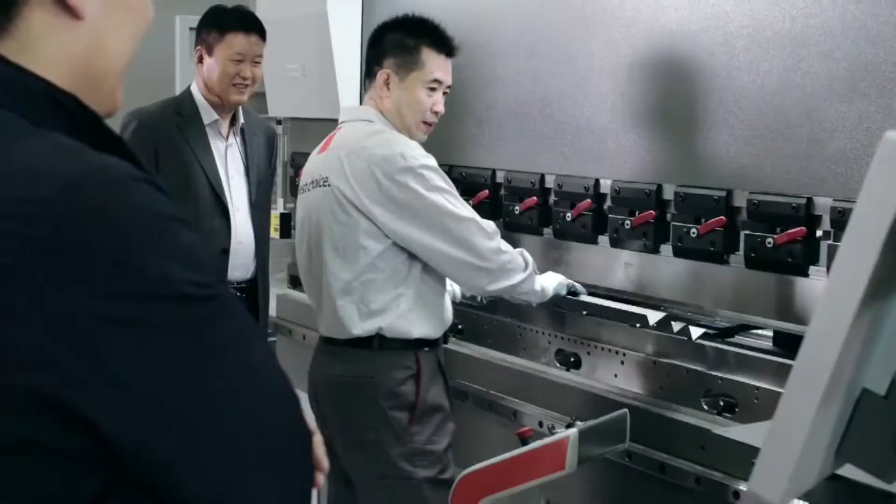Sorry, we are here for you. I mean, I hear the words, but I'm not getting anything from them, you know? Could you please just say the lines?

May I? It means that we offer much more than just a machine. We support our customers with flexible financing models, training, maintenance, a long-term spare parts service, phone hotlines and online support. And we also operate local sales and support offices in many, many countries.

Yes, now you see, now it's coming alive. We should be saying this. It is more text, though, so we will have to renegotiate with my agent. Can't you just record it and we'll look at it later? Well, I'd love to, but my agent would kill me. If only. Fine then, continue with the script. Right you are. Where were we? At customer service and post-sales services, would you believe? Rolling.

We don't simply develop machines that cut or bend sheet metal. Our customers need flexible systems for ever-changing order positions and batch sizes. Automation to achieve top productivity with integrated systems and the right software that cross-links everything.

Bystronic stands for Swiss quality. Sorry, really? Swiss quality, I mean, it's a bit of a cliche, isn't it? And actually, while we're at it, your slogan, best choice, kind of sounds like we've just won the buzzword bingo. Guys, if you want to sort this out, I'm just going to pop out for a smoke.

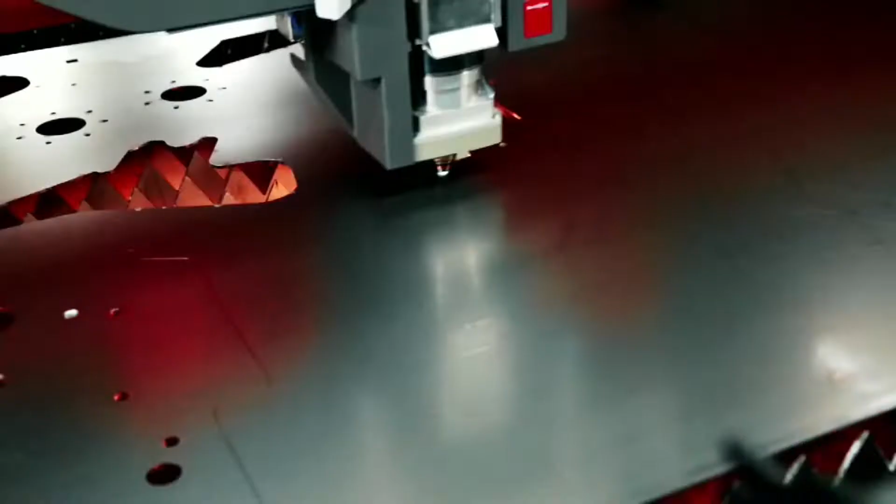Let me explain. First of all, Swiss quality. Do you know the Bystar fibre? The Bytrans Cross or Bysoft? Have you ever seen them laser cutting and bending those sheets? It's like butter. Once you've seen it, you can't help but be excited. The beauty of a laser cut, the precision of a bent metal sheet, from very small to very large, but all with the precision of Swiss clockwork, perfectly formed and expertly fitted.

Now, best choice. When you say yes to a partner, be it in business or private life, you make a commitment to the future. Now, you're still young, but one day, you're going to want someone for the long run. Someone who shares your vision for the future. You see, at Bystronic, we think about tomorrow's sheet metal processing.

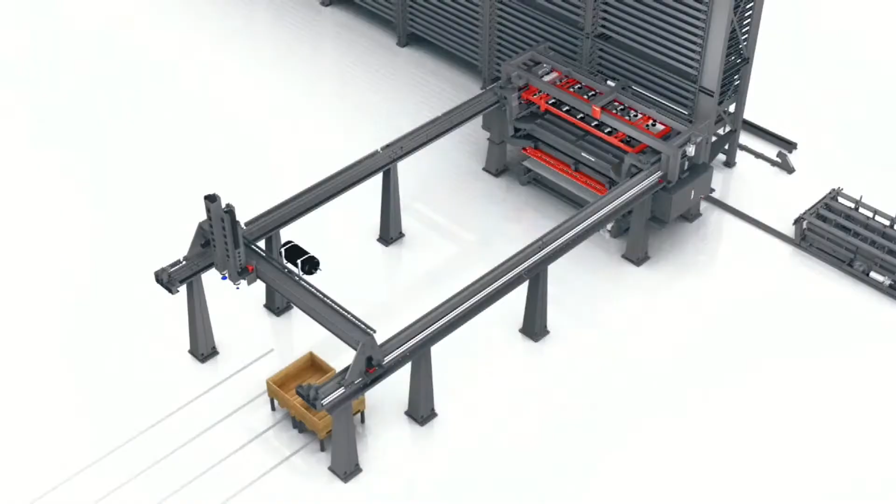We have some footage of that, right? In what we call the smart factory, variable orders will be produced automatically on flexible systems. A clear vision and state-of-the-art technology means cost and process optimization, which in turn means higher earnings. And who's behind this success? The employees of Bystronic worldwide. Now, you'll say that's just another cliche, but nobody else sets new standards like they do, with their enthusiasm, their ideas, and their know-how.

Actually, I stand corrected, because our success is also due to our clients. It's their feedback that we use to develop new technologies. And until they are perfectly functioning, we will not launch them. And none of our employees will settle for less. Not in Asia, not in America, not in Europe, not in Switzerland, nowhere. And that's what we mean by best choice.

I'm sorry, I think I interrupted you. Did you record this? Sorry, did he say something? I couldn't hear a word. He says we're done. Really? That looked like more words to me. No, really, we're done. But you can stay here till 5 because it's in your contract. Oh, no, I'm more than happy to do another version. We'll just reach my agent later on. That's no problem. Gentlemen? Hello?

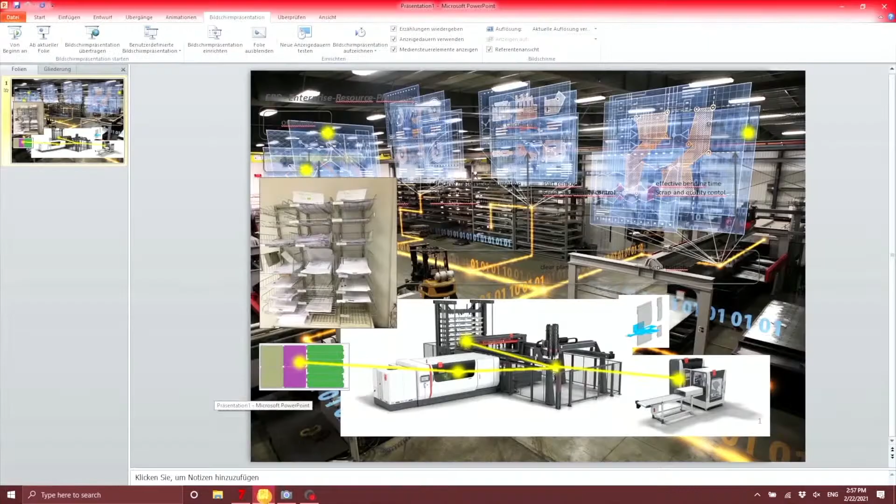Imagine your sheet metal production as follows: for example, you have a laser system with automation, a small storage tower behind it, a clearing area, and an automated bending machine. The entire production order, from quotation to shipping and invoicing, is managed in your ERP system. You receive the parts from your construction department, or as 2D or 3D data from your customer.

The NC programs for your machine are generated in the production planning and programming department. At the beginning, the customer's production order is created in your ERP system. All other data is thus already generated in digital form. At the same time, CAD data are also designed or made available, and these must now be transferred to work preparation.

Most of the time, it looks like this. This is a picture from our own work preparation before we worked with the Plant Manager module. Order papers are printed out and the programmers have to import these 2D or 3D data individually into the Bysoft 7 software.

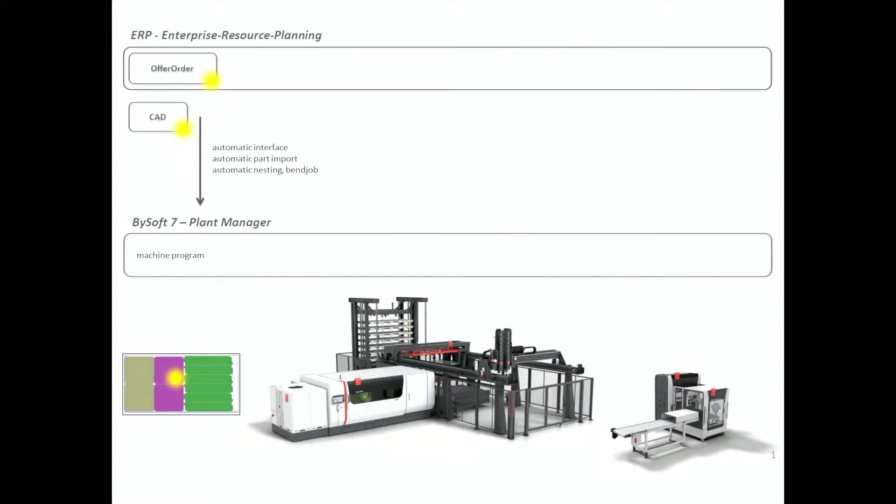The jobs are now sent to the laser and the bending machine, which the operator already sees in the optimal order in the control's job list. The jobs are sent to the machine in such a way that setup and non-productive times are as short as possible.

If the job has been cut or bent, the machine automatically reports the production data back to your ERP system. This gives you the perfect basis for an order post-calculation.

The machine reports back the actual material consumption, including the waste. You can thus trigger a raw material posting in the ERP system. The ERP system receives the effective cutting and bending time, including waiting and stopping times, in order to book these on the order.

The Plant Manager has the part removal module for quality control and for reporting rejects. A screen is made available to the operator in the clearing area, on which the cutting plan is displayed visually. He can thus quickly and easily sort the cutting plan onto pallets based on orders or other criteria.

With the Plant Manager, you can digitize the entire process flow and no longer have to manually book the individual process.

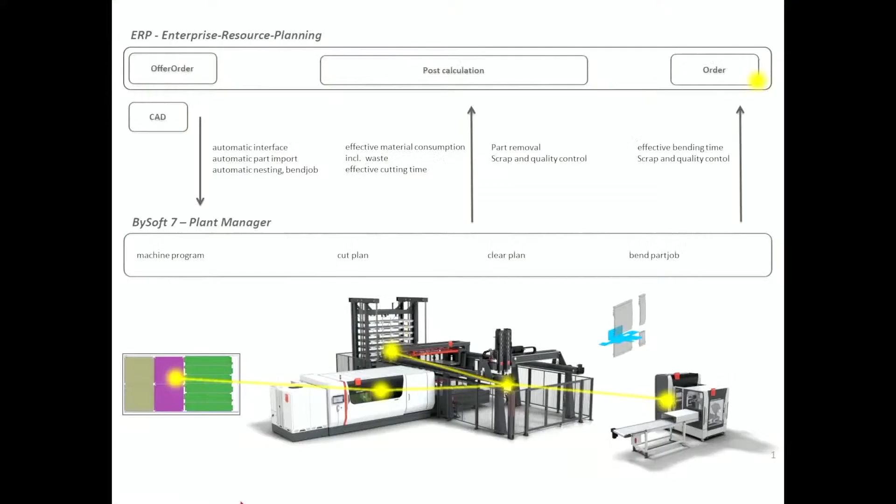Let's assume my customer ordered the parts and I want to manufacture them. The Plant Manager runs as a service and is installed on your server, so it works 24 hours a day, 7 days a week. If a production order is now created in the ERP system, it can be imported automatically.

In my example, I have a Bystar and a Bysmart Fiber with different laser powers. There are also two bending machines: one Xpert 250 tons and one Xpert 320 tons, each in 4 meters.

The Plant Manager knows the available raw material sheets and also the residual sheets. These are selected automatically. Perfect nesting plans are now generated for the respective material and the respective machine. Residual sheets are automatically engraved and saved in the administration. All of these jobs are automatically scheduled in the calendar.

The bending jobs are also generated with a job assistant. All bending programs are planned in the perfect order on the machine. You already know the module - it is the tool setup optimizer, which is executed automatically in the background and guarantees you an optimal bending sequence on the machine.

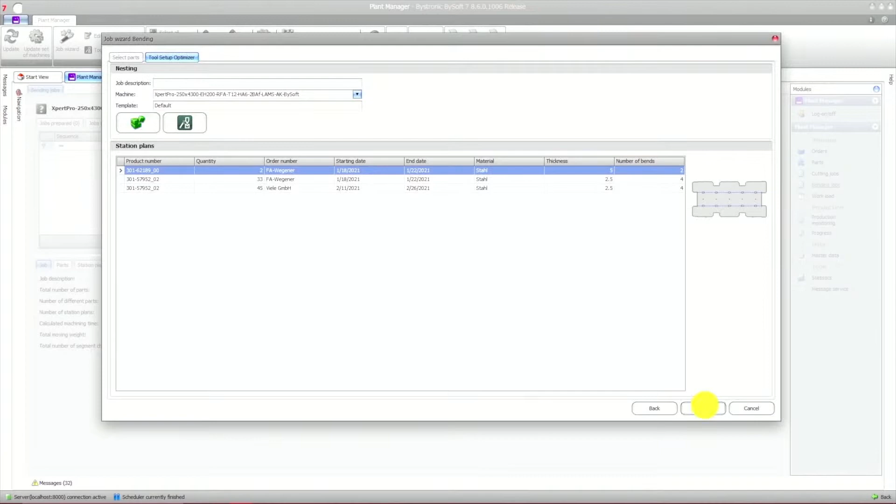Thus, all machines are perfectly programmed. To remove parts from the laser machine, the part removal module is available. In the part removal program, the cutting plan is shown in color according to the order number or according to individually adjustable categorization, such as the customer or a subsequent work step.

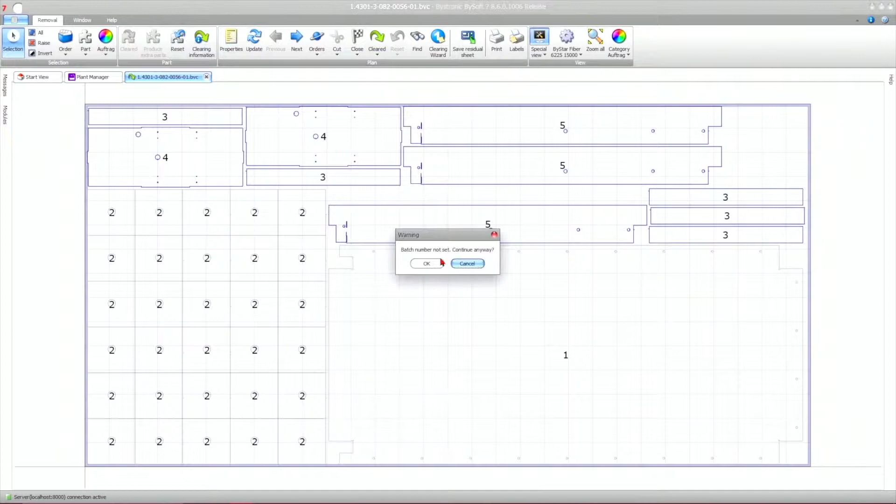With this information, your machine operator clears the cutting plan in the shortest possible time and sorts the parts onto the correct pallets with little effort. In addition, batch tracking and residual sheet management can be maintained via this module.

You see, the Plant Manager is the optimal support for your process planning and your programming department.

Orders can be sent from the ERP system to the machines in a paperless and process-reliable manner within a very short time. In this way, you not only optimize the interfaces, but also your entire production process.

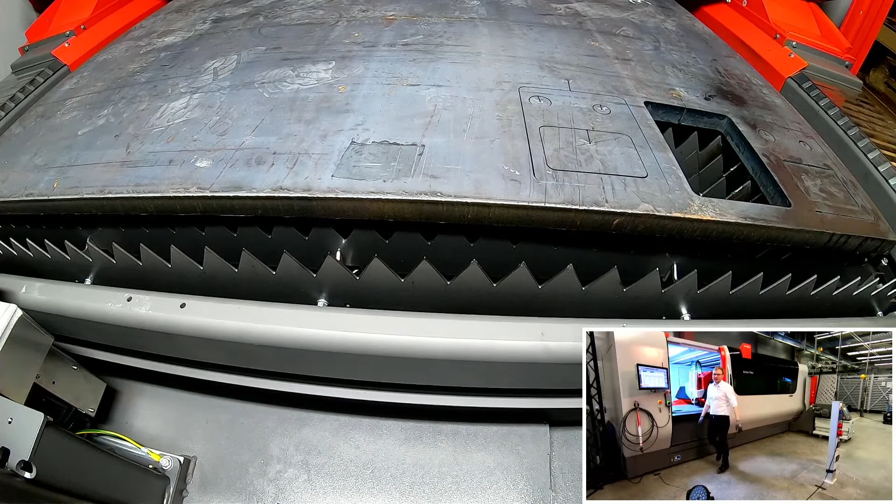We are now nearly finished with the part, you see, and we can now open the door. I don't want to touch this part now because I think it's quite hot. But this is nearly the same part we did a couple of seconds before in the last event, and that's 30mm cutting with our flagship product, the ByStar Fiber 15 kilowatt.

And with this, I will hand back to my wonderful colleague, Sarah. These are great news, Eric. Thank you. So this 30mm part is not only there to show you how fast and precise we can cut even in thick material. This ByStar Fiber 15 kilowatt laser cutting system is also a part of Bystronic's future.

So Carsten, can you tell us more about Bystronic's future?

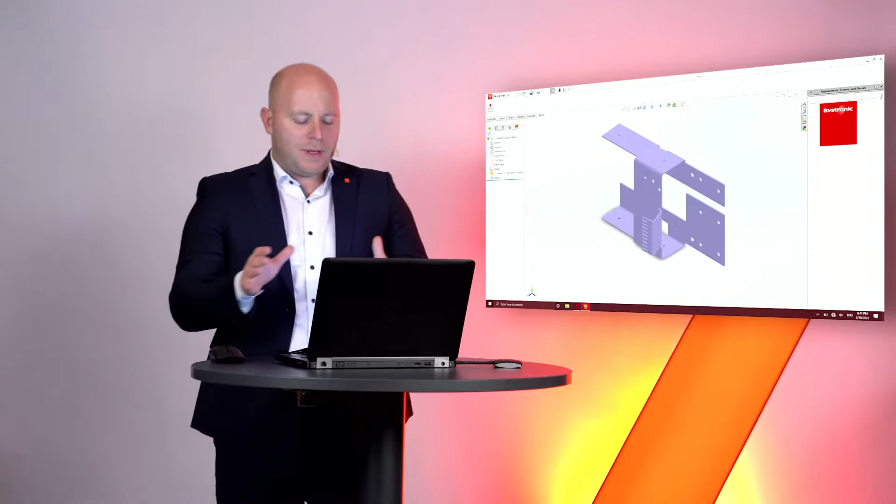We create and import 3D parts normally with the Designer. The Designer is our CAD module, and sheet metal parts can be constructed to be bendable and imported here. File formats such as STEP, STP, and SAT files, as well as native data, can be imported here, and the processing of assemblies is also possible.

Today I will show you how we can import all this data with our new module, AutoPart. The AutoPart module enables you to process 3D files, 3D parts, and assemblies fully automatically, and create bending and laser programs. In addition to STEP and SAT files, native data and assemblies can also be processed.

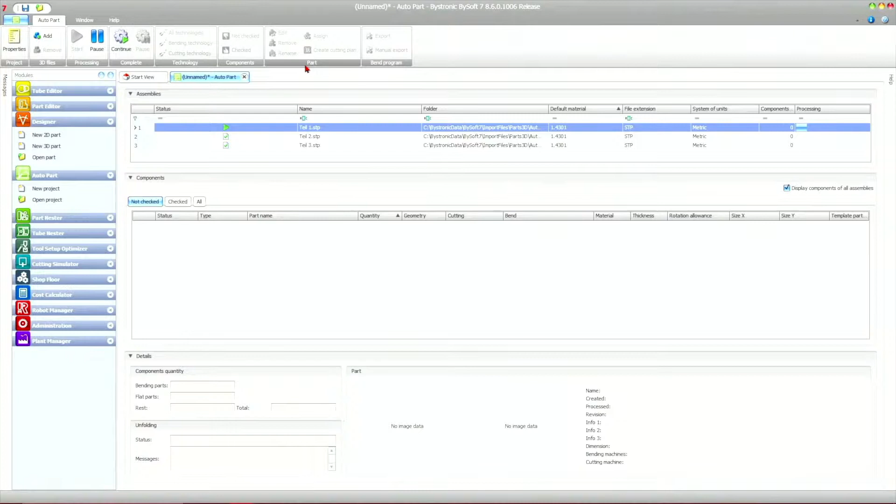The assembly will be separated and correctly unfolded at the same time, and the flat and bend programs are created. Non-sheet metal parts are recognized and filtered out independently. So I will start the automatic process, and we will see how the program unfolds the parts and sets the right bending and cutting technology.

The parts inspection shows you at a glance whether manual post-processing is necessary or the component is finished. The components are automatically saved and ready for production. On this part we have a warning, so I open the part editor to check what's wrong with the part.

Bystronic works with traffic light colors here: red is for not producible, yellow is a warning sign, and green is error-free. In my example, a contour is recognized in the entry zone of the bottom tool. This can now be provided with a relief cut independently and quickly.

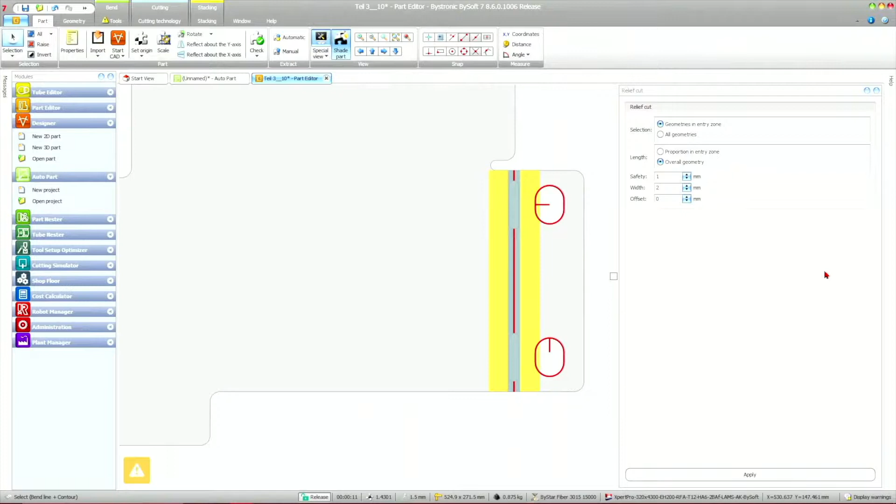A change or alteration to the geometry requires the bending technology to be restarted. The bending process is now simulated and the feasibility checked.

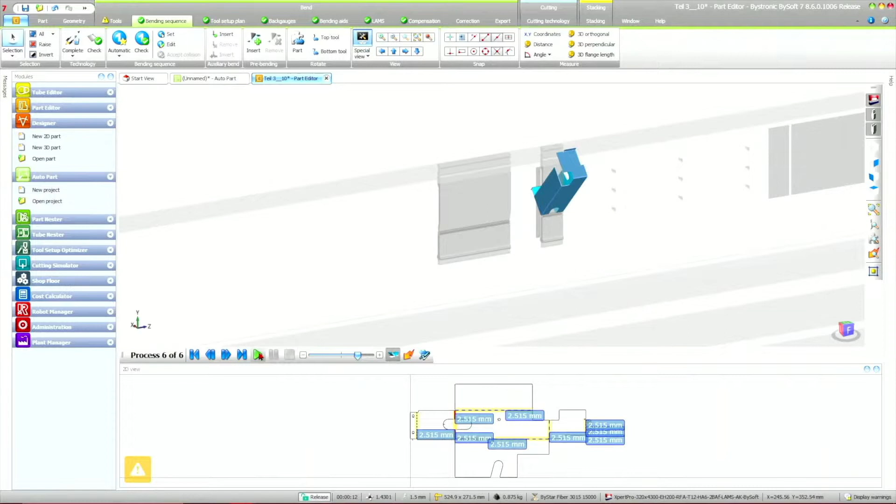The existing top and bottom tools are loaded from the virtual tool cabinet, and with automatic bending technology, the part is automatically shortened correctly. BySoft 7 works with empirically determined values which ensure that the parts fit perfectly. The bending sequence, tool setup plan, backgauge position, and all further process steps are also created automatically. It is possible to intervene manually at any time and flexibly adapt the process steps.

Here we can see the estimated bending time, and we can see the cutting time for the laser.

With the tool setup optimizer module, the bending programs created are now put into the optimal sequence in order to minimize the setup process on the machines.

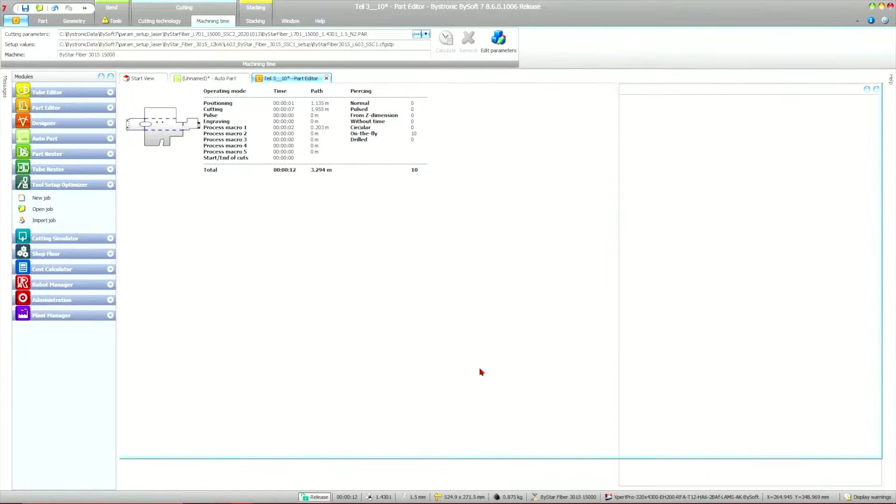Here you can see the different parts from the auto part module. A bending job with several bend parts is created as a package. The bend parts are loaded and put into the optimal order using the program tools and the station plan. Tool time, setup time, and bending time are taken into account here. The operator of the machine can thus start a job once and guide it through the shift.

Now it is possible to switch to our other program. It's called Cost Calculator, and with this program it is possible to do a perfect part cost calculation. Here you can see we have different laser machines and different process steps, so we can choose if the part will be cut on a BySprint Fiber or on a ByStar Fiber. So I can select the right cutting machine.

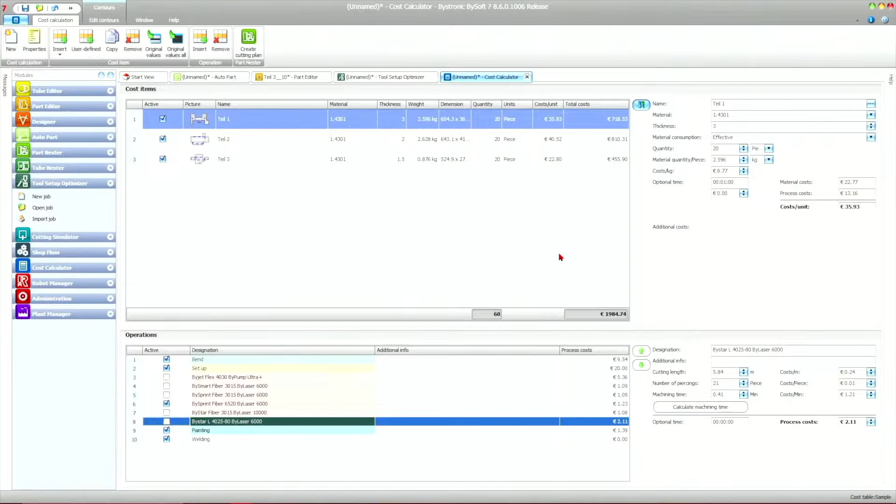And now we get the costs for this part. We can see the material costs, we can see the process costs, and can send this information to our ERP system to have a perfect calculation for an offer or something else.

This is how quickly and easily you can create perfect laser and bending programs with BySoft 7 in a full automatic way.

Good job, Benjamin. So let's continue with the bending technology for highest demand on process speed and flexibility. Our flagship, the Xpert Pro, highlighted by the dynamic crowning and the laser angle measuring system, presented by Ronny.

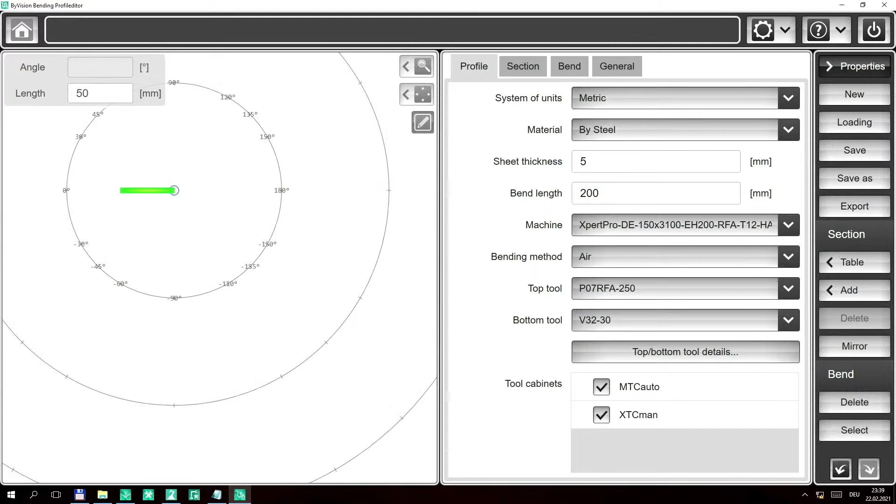Then we have to bend 5 bends: 1, 2, 3, 4, 5. This is very simple - we search a start point, then we can slide with the finger around the screen, and then we can select the bend length. We can also just touch like this, and go to the table, and here we can type in our bend length: 50, 50, 50.

Here I made a mistake, 50 - one I have to delete maybe. Like this - so this is also 50. Then we have programmed our part.

We take over the part to our software for the bending machine and say okay, I'd like to produce the part. The software calculates the right bending sequence and also the place we have to put in the tool. This looks like this - you see also on the optical bend guiding system for what place I have to put the tool. In my case, we have the tool changer - they change the tools automatically. We will explain this a little bit later.

Just for this, I go to fast change, press the start button and hit OK, and then the tool changer changes the tool. And this time I can explain a little bit more about the part.

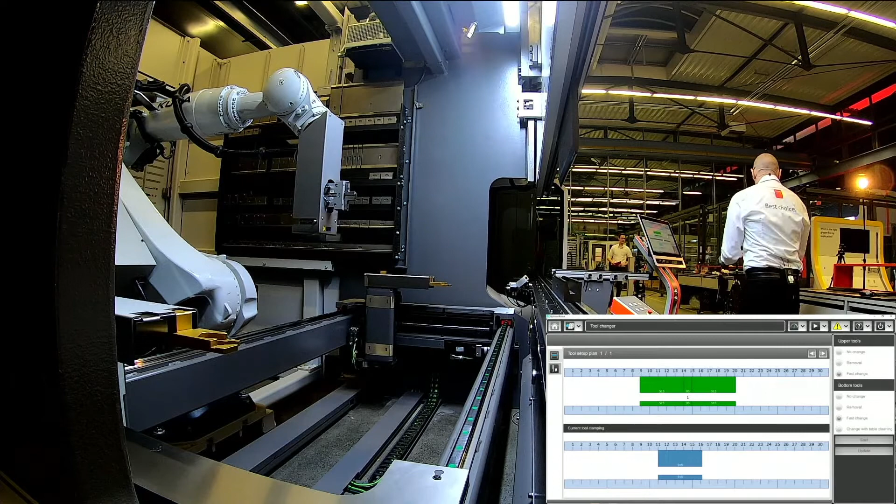First of all, you see I have these holes inside. I will start maybe from this side. The machine knows just for 1 meter bending length. We can hold the part like on this side or on this side, doesn't matter. We have also some small parts, these are our reference parts. I take just one of this for the first bend. We can hold this in the finished part to check that the bend angle is the same on every place, on every bend. This is the first bend we will do, and then we bend all the other bends for the part, and you can also see what the machine will do.

I will switch on the crowning compensation page, and then you see how the crowning is adjusting during the bending sequence. This will be adjusted dynamically. This means we are measuring over the pressure sensors on the machine how much force we really need. If we need a little bit more, then of course the crowning is more. If we need a little bit less crowning, then the software says, okay, I adjust the crowning a little bit less. The tool changer is finished. We go back to this area. Let me go to the produce area, and I will switch on the compensation page and the crowning area.

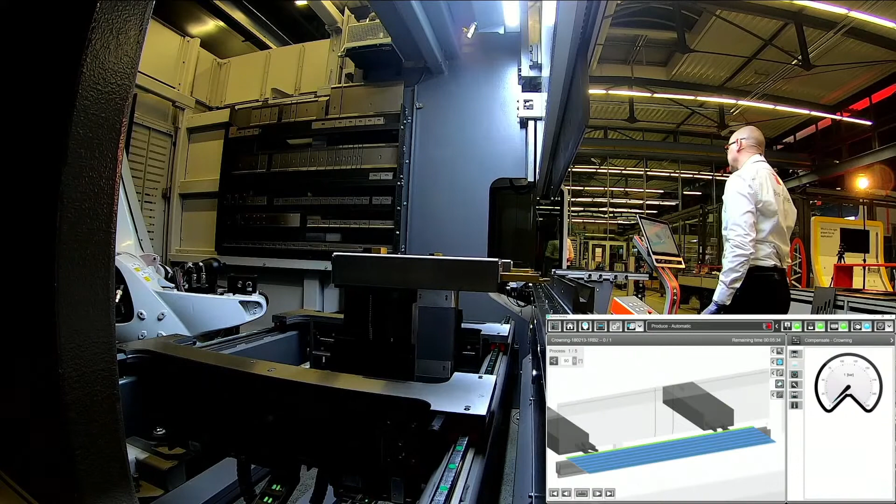Okay, first of all, I bend just this small part. This is our reference plate. You will see if I take the bend, we need very little crowning. We wait for the safety system. This is moving down to the exact height of the tool, checking if it's the right tool, and then we can start in fast speed. Okay, we do the bend.

And you see, let me go back to the first bend. We have very little crowning. On the blue sign, you see there's nothing really moving.

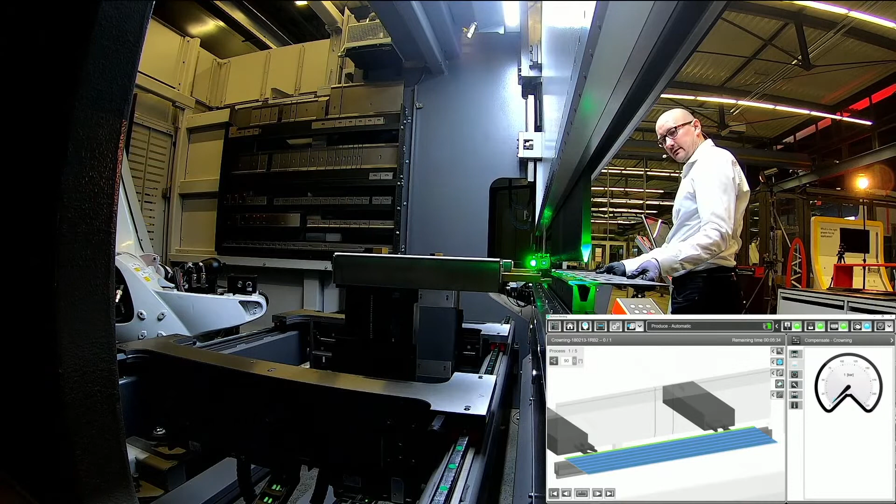I place the small part here on the side, and then we start with the big part. So first we place the backstops, and then we start the bend. And now we see we need a little bit more crowning, and of course for every bend the holes will be smaller and smaller, and we need more force for the part, and we get more and more crowning from the machine. So for this part I just programmed the bend length of 1 meter. Of course the machine doesn't know how big the holes here are.

So the second last bend, and now the last one. This is of course in the full material, and in this bend we have the most crowning on this part. Let me place the part on the side so you can see it, like this. And then I take my small part. You see I place it on every bend, and I can also place it on the bend in the middle, and the bend angle is exactly the same. This is the most important thing for the machine. Also in the middle of the part and on the end or the other side of the part, this is the same. The crowning system does this automatically. So now of course we have a straight bend over the whole length. Doesn't matter on what side you are bending.

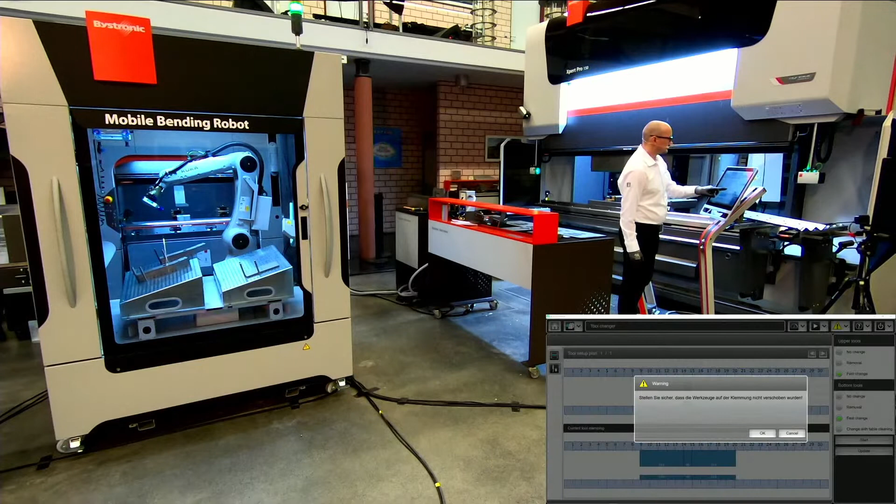How we get the right angle, for this I show a second part. Then I can explain a little bit more about this. Let me take this one. Don't need to save the new part. Let's change also the tools. Say yes, the tool changer is changing the tools for this part, and I can explain this one a little bit. You see this part looks a little bit more complicated.

We have different angles, and here we measure the angles that we get. The first bend is a good bend. We have different angles here, I think 100 or 110 degrees and 90 degrees, and we also have some small bends in the middle. What we can also do, of course, if we cannot really measure the angle, we can also say, okay, one time I already measured this on the part, I take over the value to another bend, then you don't need to measure on every bend on your part.

What you can also do, I will show it on the last bend on this part. If you are not really sure what kind of material it is, or the variation of the material could be very big, then you can also say, okay, I'm not really sure what the spring back of the material is, I will measure this. On the first bends you will see, we do a normal compensation over the laser system. They are measuring the angle, making a compensation. This goes automatically and really fast. And on the last bend, then we also measure the spring back, and the software can also compensate the spring back.

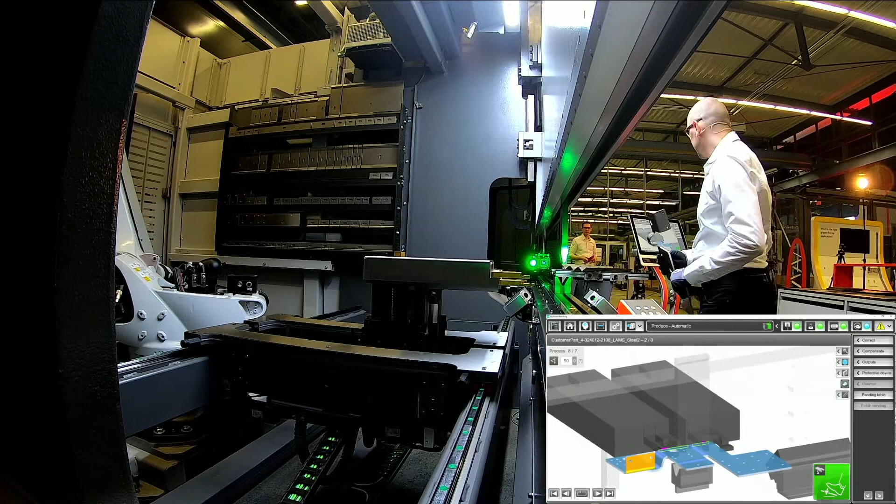And on this bend, we can already measure the angle. Maybe some technical details: we need around 50 millimeters for the flange length, outside the tool, so that we can measure the bend angle.

So, the second to last bend. Here we take over from the bend before, and for the last bend, I explained it before.

We measure the spring back on the machine. You will see it: the machine bends 90 degrees, releases the material a little bit, and re-hits, compensating the spring back as well.

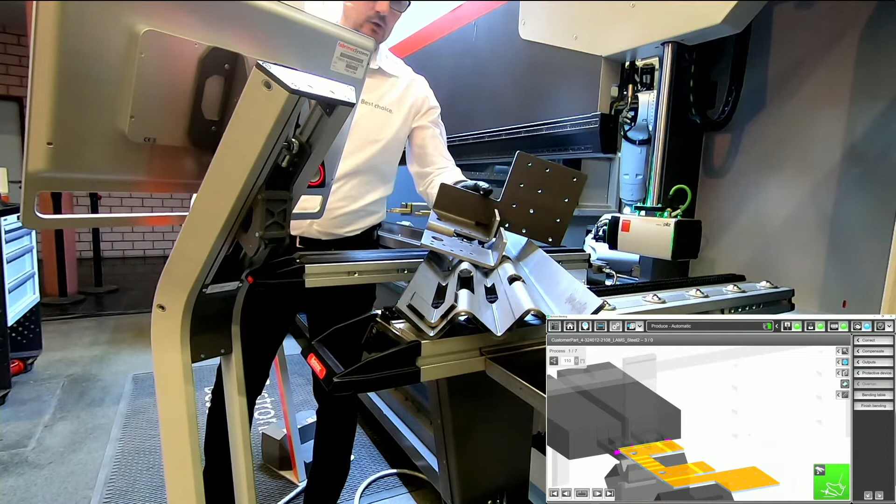Okay, then we have the finished part. This looks like this. I'll hold it in the camera so you can see it a little bit. The angle measuring system shows that the first part is already a good part, and you don't need to do a correction. This was a fast introduction to the compensation systems, especially the crowning system and the laser angle measuring system.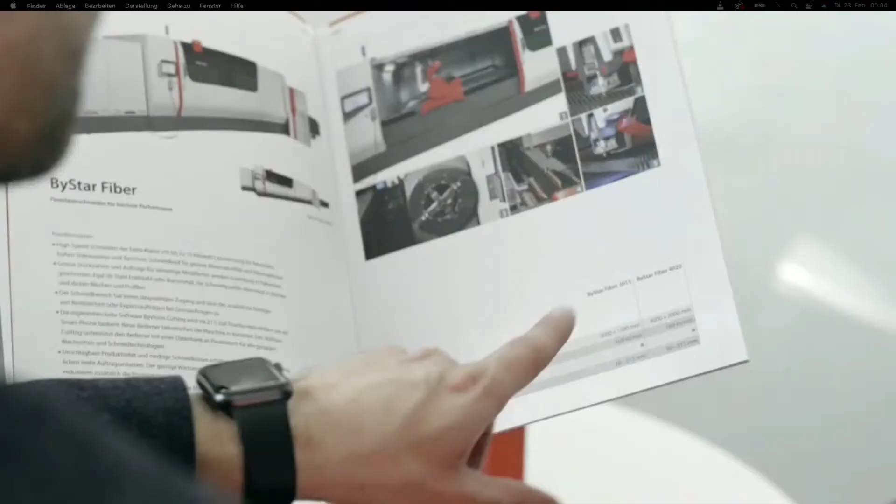We offer worldwide presence and competence. We speak your language and understand your needs. We are here for you.

Sorry, we are here for you. I mean, I hear the words, but I'm not getting anything from them, you know? Could you please just say the lines? May I? Please.

It means that we offer much more than just a machine. We support our customers with flexible financing models, training, maintenance, a long-term spare parts service, phone hotlines and online support. And we also operate local sales and support offices in many, many countries.

Yes. Now you see, now it's coming alive. We should be saying this. It is more text, though, so we will have to renegotiate with my agent. Can't you just record it and we'll look at it later? Well, I'd love to, but my agent would kill me. If only. Fine then, continue with the script. Right you are. Where were we? At customer service and post-sales services, would you believe? Rolling.

We don't simply develop machines that cut or bend sheet metal. No, our customers need flexible systems for ever-changing order positions and batch sizes. Automation to achieve top productivity with integrated systems and the right software that cross-links everything.

Bystronic stands for Swiss quality. Sorry. Really? Swiss quality. I mean, it's a bit of a cliche, isn't it? And actually, while we're at it, your slogan, best choice, kind of sounds like we've just won the buzzword bingo. Guys, if you want to sort this out, I'm just going to pop out for a smoke.

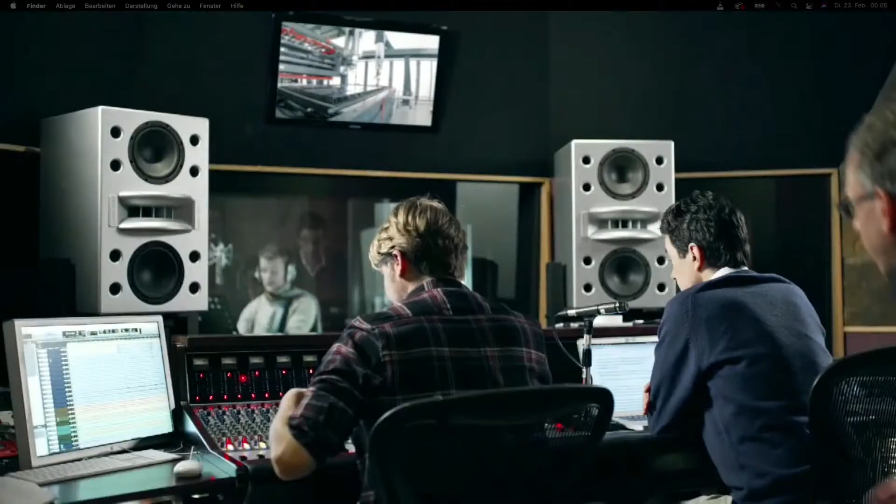Let me explain. First of all, Swiss quality. Do you know the Bystar fiber? The Bytrans cross or Bysoft?

Good morning. I'll show you how to program a part on our new robot manager. This is a software we developed to program our robot cells, and it's extremely easy. Right here you see the main page. I can open parts, that's what I'm going to do. These are the parts I used last. These are already projects which exist. And here I have my customer database where I can find parts which I want to robotize. So I take this one here. Here I choose my cell.

I know that I have this cell, choose that one. And now we get to the main page of the robot program. And here we have to choose, for example, the cell, the grippers and everything. I can check my part again, double check it. All right, this is the cell. So I see my pickup pallets here, I see my chute, I see the machine. I can switch different things on and off. Yeah, normally I want it like this. This is the easiest to program.

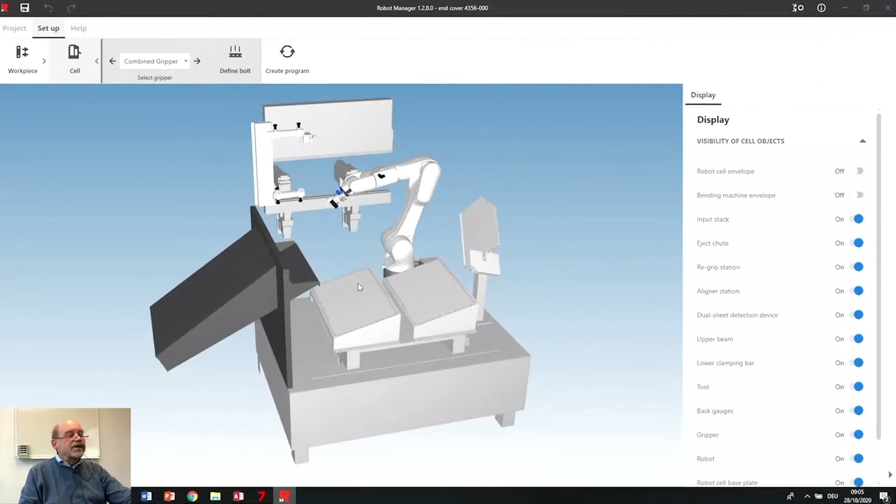So what I need to do here is to choose a gripper or a vacuum cup. That's what I did, and then I make a program. So that's what it does here. I can verify all this. I don't want to do the dual sheet detection. I know that my parts don't stick, so I'm fine. Create a program, and it will now make blocks. For this program, I need 2 blocks for the bending. They're right here at the bottom, and then home position pickup, that's where I am now, reference, and drop it

in the chute. So this is where we are, and this first bit is about the part itself. So I need to tell the machine where the part is. So I say, yeah, it's here, it's fine. Next position. What we've tried is to use as least possible this side here where the numbers are. I don't want to type numbers.

I hate numbers. So here, this is the reference table. Parts should drop in this corner. So what I do is I let it drop. We calculate. We have a physics engine in here. Friction, gravity, inclination, and it drops right here in the corner. So we're good. Last bit here is how am I going to let it drop in the chute here. Like this. Maybe put it in a little bit more. A little bit more.

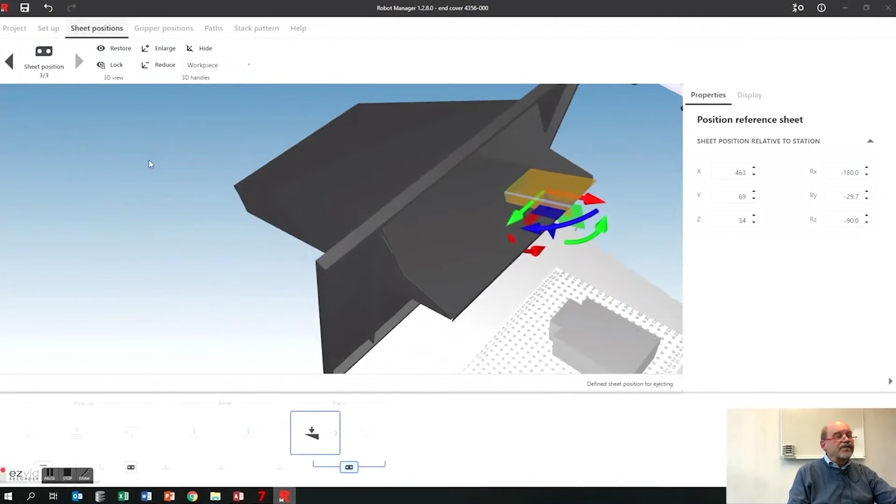That will drop, no problem. Once I've done that, I'm finished here. There's no more black arrows. So the next one is the gripper positions. I need to do the same thing again.

Something very clever we've done here: I have a before and after view. So if I make a movement here, I can see the result of that movement here. If I make this movement too big, it results in a crash here. I don't want that, so I'll put it back.

Normally what we calculate is pretty good, you don't need to touch it. So the next position, from here to here, that's fine. Then first bend, second bend, and then drop it.

Again, if I want to move something, I can move it, no problem at all. Put it back. And again, of course, if I touch something, it will get red, and that's basically a bad idea. I'll leave it like this, so that's basically it.

At the bottom, everything is yellow. That means I've done it, and now I need to create the robot program. So first I hit this optimize configuration. Now the software tries to eliminate unnecessary movement. It's done that already, and then check.

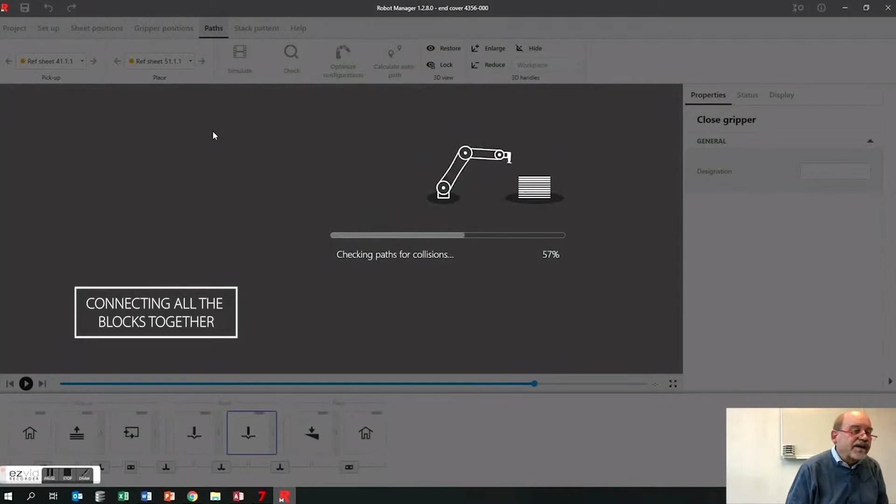Now it's connecting all these blocks together, and if there's a collision between blocks, like I have here, it's red - this is red, there's a collision. Also these little dots indicate the collision, so if I go there I can actually see the collision. It will go through this thing here - that is not a good thing.

But we've noticed that there is this collision, so we've already done the next step. We've created these two blocks in between the other blocks. These two red blocks are points in space which haven't been calculated yet. But if I push this button, it calculates. So we add points in space, and now I have a complete collision-free robot program. So this is it, this is done.

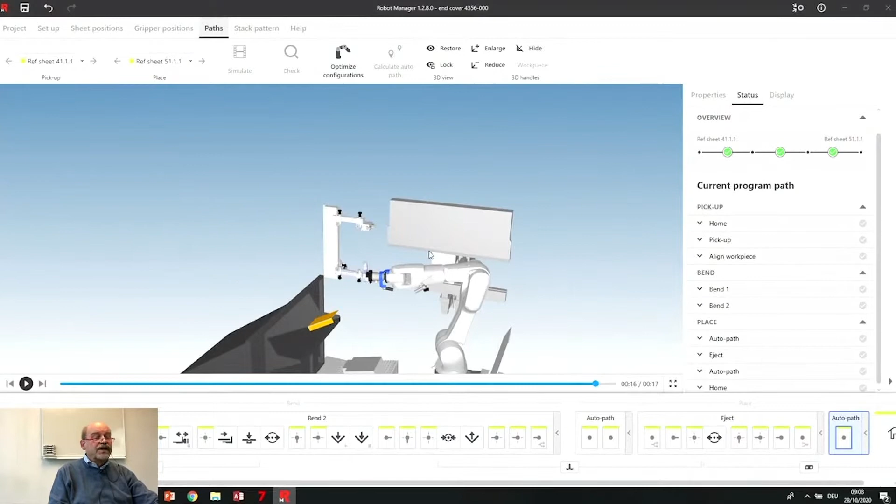What I can do now to make more autonomy in the cell, for example, is make a stack pattern. Here I can say copy this one in the Y direction, so I've got two now. I can enter my pins - I want a pin here, I want a pin here. This is for the operator, to shift his parts against.

One here, and I see that this one is red now, so I need to move it a little bit more, like this. That's okay. Then I can do the same thing for the place position - that's here. Again, I can just say copy this one, copy it once more, like that. Yeah, fine - so I don't get a big pile at the end of my pallet, I get three nice little piles.

That's much better. I need to calculate these paths because I've added positions, so I hit check again. It will recalculate everything. The middle bit will stay the same because I didn't change that. And now I have new positions.

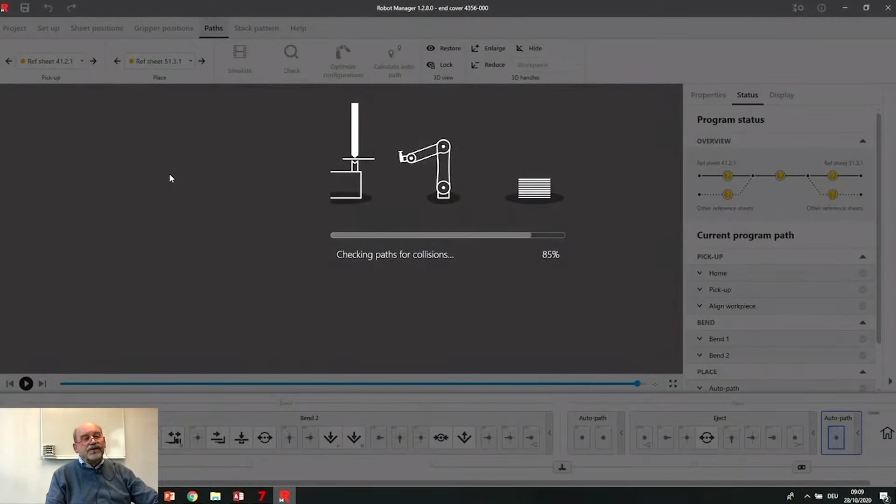Everything is green. The pickup positions are here, and these are the chute positions, and everything is done now. I can run this - I can choose here which one I want to see. This is the first one, reference position here, it's the middle one. So let's simulate this.

We choose the views automatically so the operator can see exactly where the movements are. This is happening 100% in real time in the cell also. You can block the view with these little buttons here, so now our program will keep this view until the end of the simulation. I will unblock it because otherwise we can't see where it drops the part.

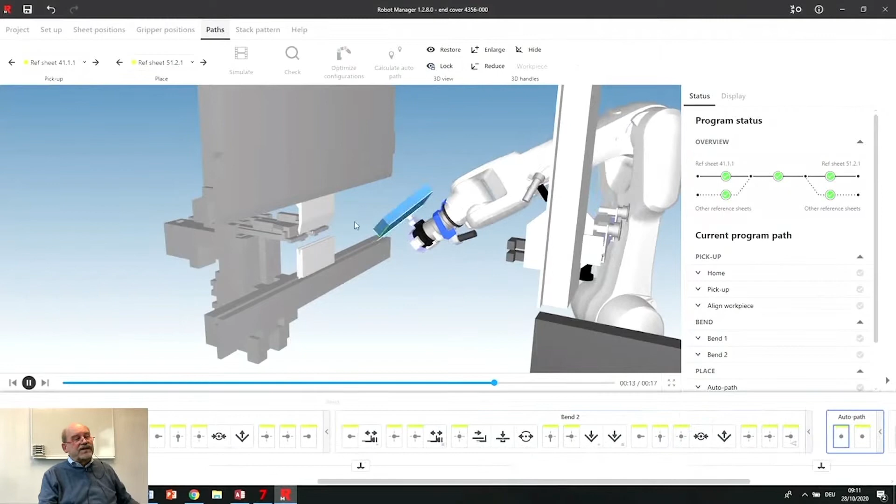So bend number 1, bend number 2. If I wasn't talking, making a program like this took 2 to 3 minutes maximum. Of course if it gets a little more complex I'll need a bit more time, but it's still super easy to make programs with Robot Manager.

I'll unblock this again, and then it will put it on the output here, and then it will go back to the home position. So that's it, I need to save this part.

I need to export it to the machines. That's what I do here - save, and then here. It will also make a drawing showing where the operator has to put these pins, the pins for the table, so he can put them in the right position.

And that's it, I'm all done now. Another little feature in our Robot Manager: of course, when you do automated production, you need stacks to pick your parts up, and it would be nice if you could have stacks to lay your parts down too. That's what I'm going to show you here on the Robot Manager.

So I've done the part, it's the same as before. I've changed the cell, so now I've got an 80-ton, 1.50 meters, and I've got this conveyor to show you better what I'm going to do. So this is all green like before.

And then we have to go to the stack pattern. Here I see my pickup place. The easiest thing to do would be to go here and say copy, duplicate, and then it made another stack. That's easy, make one more. There, I've got 3 stacks already.

And then I can also duplicate everything here to another pallet. This is the other pallet, duplicate here. So now I've got already 6 stacks, so this can run for hours and hours.

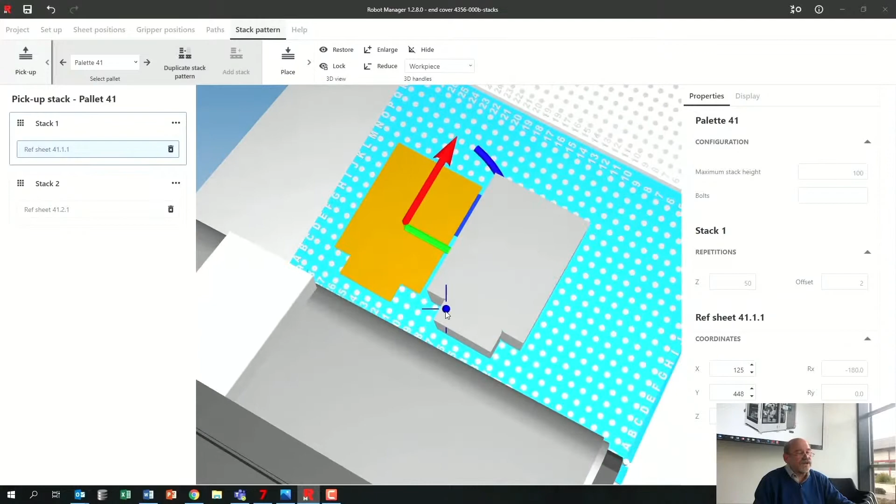I'm going to take them away again and show you some more details. Here, pallet 41, that's this one here, also this one here. Let's leave these 2 stacks because it's not done with only the stacks - I need to put these pins in, I need to reference the parts. So I'll put a pin in here and I'll put a pin in here.

So this is fine, you can push your part against this pin, and then it's referenced. And the same thing, put a pin here. It's there already. And one here. So if I would duplicate the stack now, it also duplicates the pins, of course.

What's happening is we're checking collision with these pins - first of all, the parts against the pins, but also the robot against the pins. If you put everything full of pins here, the robot cannot get to the last sheets on this stack anymore.

Also, we simulate and make the program in the way you've put the stacks down. So this is the first one, second one, third one. You cannot start here in this corner because everything would be full with parts - it doesn't work. So this is okay.

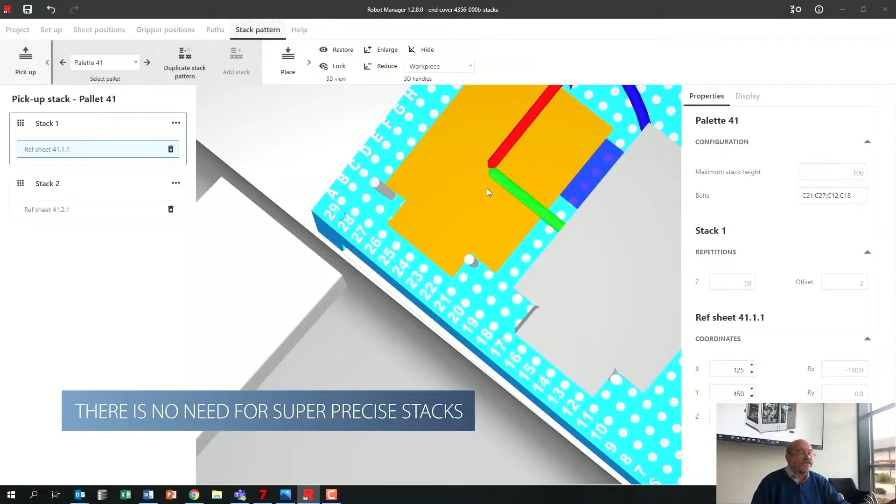Then again, you can still see that there is a little bit of space here. That doesn't really matter, you know. The moment you touch the pins, it gets red, but it doesn't need to be that precise. If you're within, let's say, 5 millimeters here, that's good enough. You don't need to make really precise, super neat stacks - they're going in the reference table anyway, so you're good.

We also have customers who just put this stack against this one, so they save pins and of course they save space also. So this is the pickup stack, and then we go to this stack here, the place stack.

One part already, and again here I'm just going to copy it. There I've got a second one, and then I'm going to put a third one on top of it. Since we don't have an automatic function for that, I need to move the part up a bit, move it over, and then maybe twist it a bit like that.

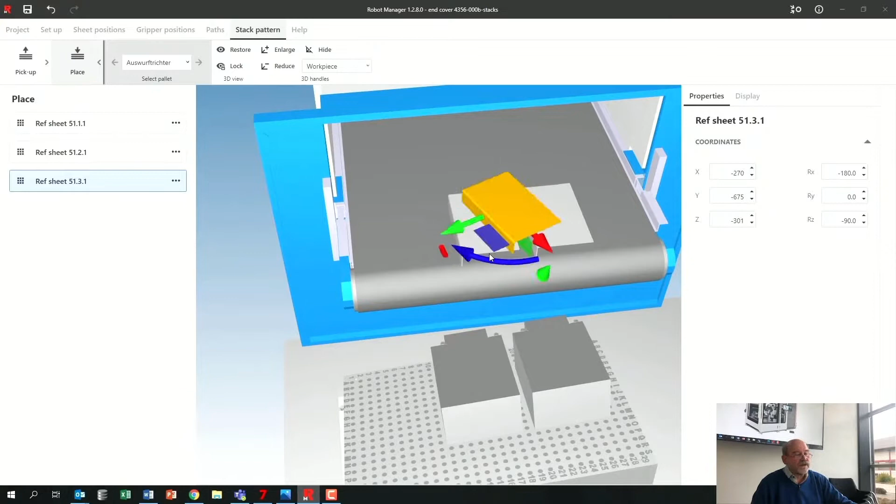And this is my output stack. So very easy to do that, no problem at all.

And then what I still need to do is, of course, make the program for all these things, because I've actually made now 2 different programs here and 3 different programs here. So I go back to paths. Here we see it's like a little railroad. So this is the original one, and these are the ones I added. Also here I see the other references, and here I see 3 place stacks.

So I run check again. It's going to simulate everything again. Once this is green, maybe it's not all green, maybe I need to change 1 or 2 positions. It's all green, great. So if I want to see that last, this one here.

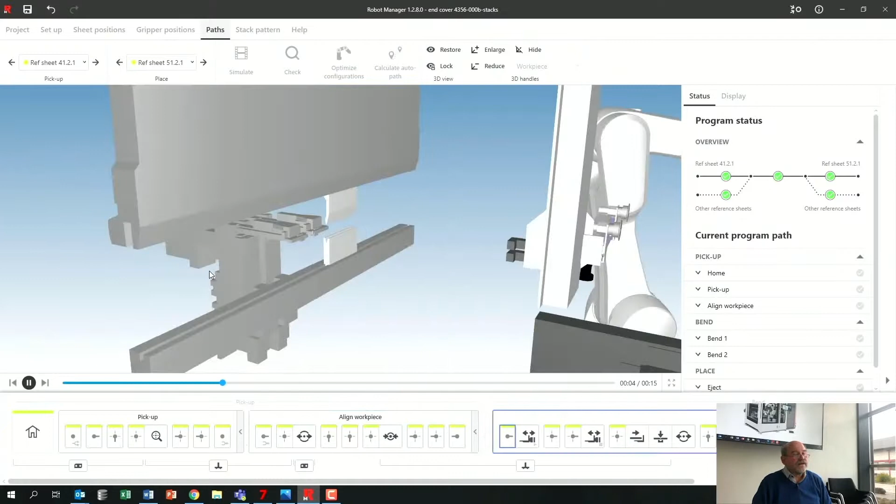The second stack, yeah, and then I can simulate it, and you will see here at the beginning that we will pick up from here. So it's already made the program, I'm just showing you the simulation. So running through, referencing, and it's going to do the 2 bends.

So I've actually made now 5 little different programs. You can use up to 4 different parts in our cell, the little cell. So you can have 4 different parts on these 2 pallets, and the moment your tools are okay, you can swap between parts automatically. We make a job list, and you can swap from one job to the other automatically. So you can have like 8 hours run in that cell, no problem at all.

It is already the last bend, and then it's going to put the part on the conveyor there where I put it. This is the second place.

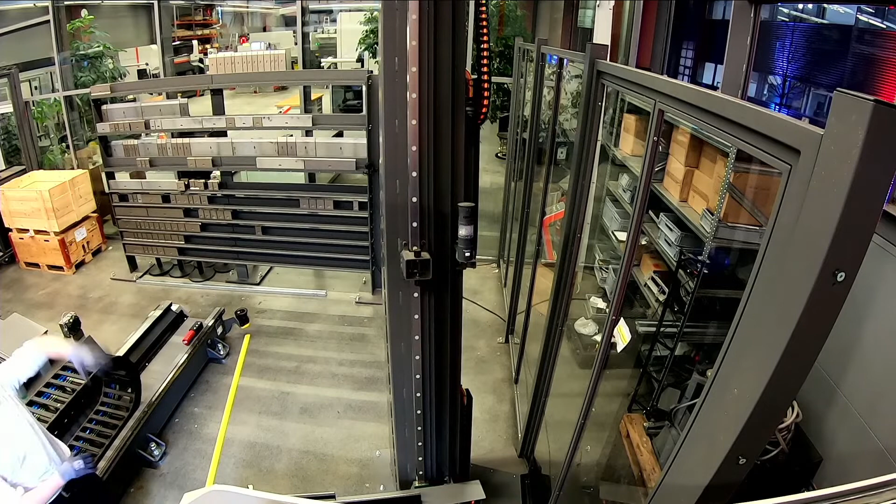Now we go a little further through the machine. What we have next is our regrip station we can see here. You can't see the arms quite well because they are in parking position. We have 2 arms that can move together to regrip your part, to reorientate the gripper. We can do this with 4 suction cups, 2 in the top and 2 in the bottom, and we can move the suction cups to the right-hand side.

We can also put the arms together to make sure we can regrip all the parts you want to bend on this machine. We're also able to use clamp grippers. We have 3 clamps total, 2 on top and 1 on the bottom, so we can use clamp grippers if a suction cup isn't usable or useful.

Also in this regrip station is the turning station for the tools, because our bending cell can also change tools fully automatically using the robot. We have our tool rack in the back to store various tools of various sizes. We can have V6 to V120 in the lower tools, and various ranges of upper tools during our bending process. We store them here, so we have a wide range.

For you as a customer, it's really interesting how we load new tools into it. It's not like teaching them in, we just hang them into our tool clamping, and then the robot will fully automatically scan the tools and give them a position in the tool rack.

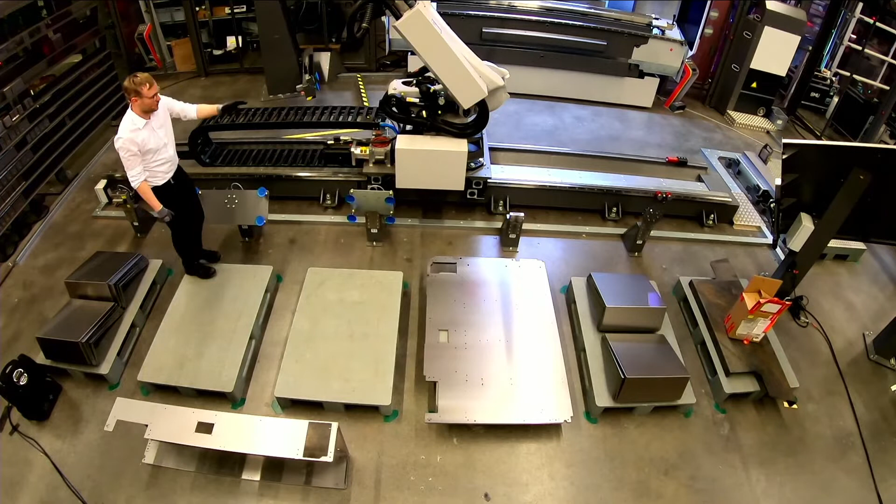What we have here in this line is our gripper depot. We have 5 gripper trays attached to the bending cell. The first one is reserved for our tool-changing gripper, so we can change the tools with that, and then we have a various range of different grippers. We can have magnets, vacuum suction cups, and grippers, so we have a wide range.

You see some of them here. We have a 4 suction cup gripper for a bigger part from a customer, a small suction cup gripper here, a 2-magnet gripper there, a small one, and the really big magnet gripper over there. So we have various grippers in the gripper tray.

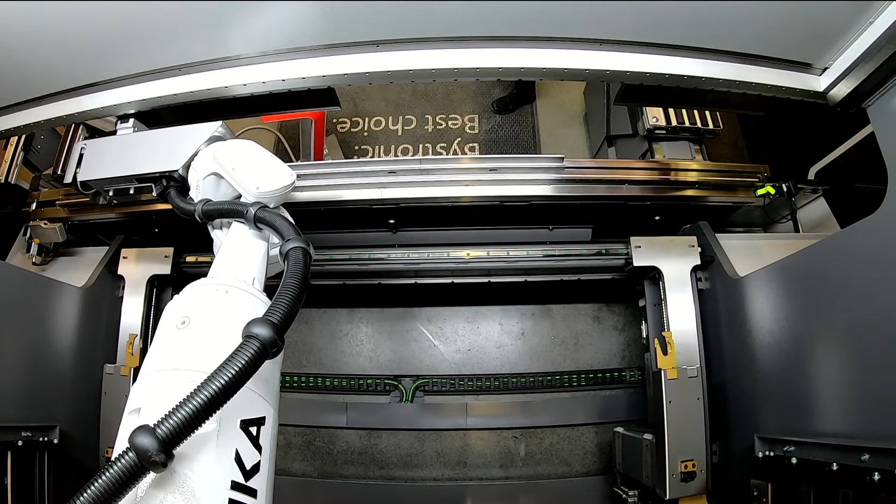We have various functions to make sure the tool change process is efficient for you as a customer, so we don't have much unnecessary drive, meaning all the robot's movements are taking a tool to a different position. You see we move this tool to the left-hand side, change this tool to the other side, also using this for the lower tools, to make sure we have the most optimized tool changing process using the modular tool changer.

What you might see in the back of the machine while it's changing tools is that we're able to store tools in 3 tool cabinets. We have 2 on the side of the machine and 1 in the back.

So we have a various range of tools. In lower tools, we can have V6S up to V120 with a maximum tool load of 25 kilograms.

And in the upper tools, we can also have 25 kilogram tool segments, P4, P5, P7, so standard punches, we can have crop punches, and so on. So we have a various range with upper tools, and there is a little bit of a special thing.

We have 515 millimeter tools, 350 millimeters high, so we have really, really big tools in this machine. And we also have various upper tool heights, so we can have a 550 millimeter or a 55 millimeter high tool, and also a tool height of 100 millimeters.

So we are in a wide range using our modular tool changer. Now I will go to my next job with the MTC, and then we will go over to our mobile bending robot. In this time our MTC can change some tools for us, which is also possible - the most flexibility of the modular tool changer is that you're able to change tools manually together with the MTC, so you can mix up your tool setup plan to have the most flexibility during your job life. So we will do a fast change with all the tools, and then we can go over to the mobile bending robot.

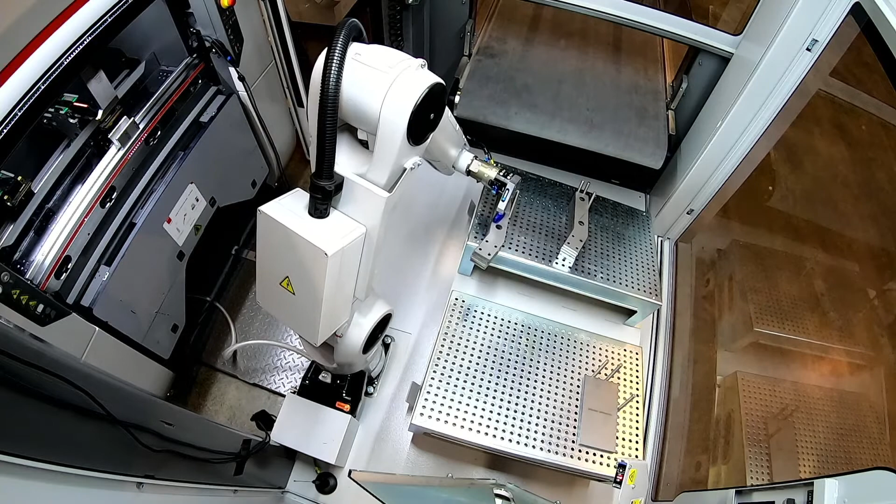And now I will start the MBR and let all the parts work through during the whole bending process. So we can start now. The robot will take the first part, go to the alignment station, pick it up, bring it to the bending machine, bend, and then put the part down onto the conveyor belt and feed it out afterwards. Quite easy, quite simple.

What you see on this machine is a really quick, simple setup for the MBR, also for the MTC and the bending cell. All machines are running properly now, all machines are producing parts. The MTC will change the tools for us to go on with the next bending steps, to go on with the next bending parts.

And I'll let the machine work a little bit now. The conveyor belt will feed out the parts to give the place free for new parts. And yeah, all machines are running.

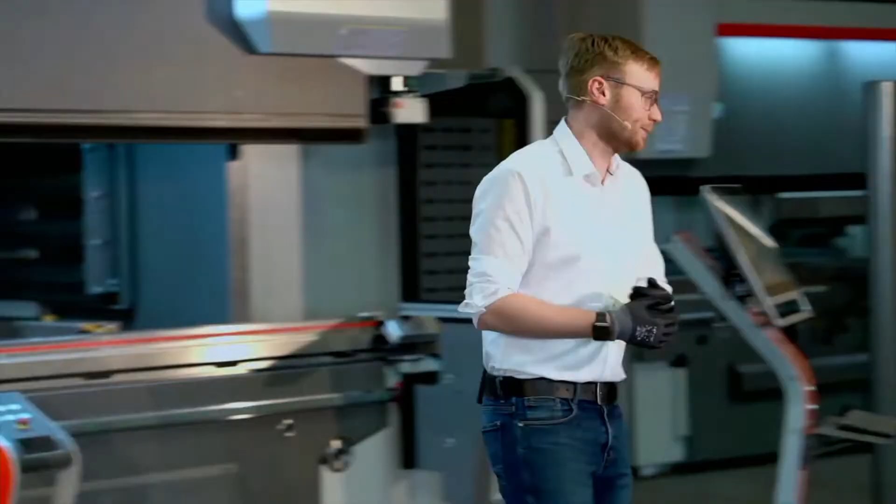So now I want to show you also the inside of the modular tool changer. The biggest thing in here is the robot. We have set up a KUKA robot which handles the tools using an air nozzle to blow out the lower tool clamping to make sure there is nothing in it, and it's also used for loading in new tools. So you don't need any technician to load in new tools if you need some more or whatever.

We have basically 3 tool cabinets in this machine to store your tools - 2 on the side and 1 in the back. We have a range of toolings from V6S in the lower tools up to V120, and we also have a various range of upper tools like a P5, P4, or P7, with a maximum length of 515 millimeters and a maximum height of 350 millimeters.

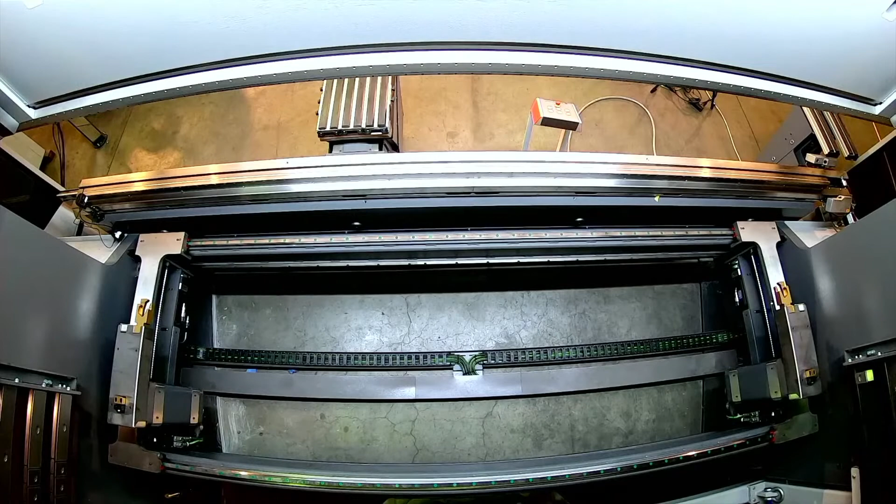What we see here also, which belongs to the machine, are the back gauges. We have a 6-axis back gauge system with slightly bigger and thicker fingers to make sure that if you have stronger material, you have enough space to put it against the back gauges and have everything correct.

What we see at the top is the turning station of our modular tool changer, used to rotate tools. We can rotate the tools fully automatically using the robot. Now we will go outside again and see how the robot changes the tools.

So we had seen the tool changer in the back and talked about some of its specs. Now we want to see that the tool changer can also change tools, and I can relax a little bit.

I just prepared a part, and we switch now to our ByVision Robot, the control software for our robot. What we can see in green in the upper section of the software is the tools we want to change in now - it's a P7 and a V80.

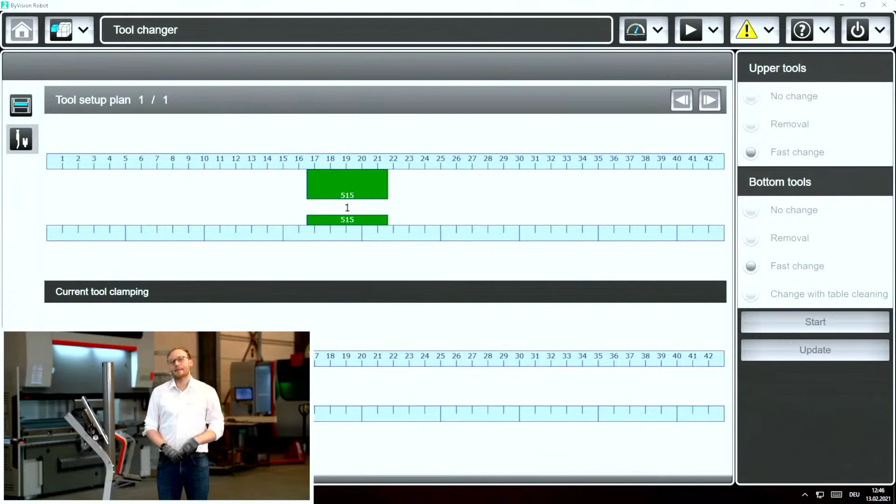To change, we only click on Fast Change and then start the tool changing process. The robot will come to the front, then wait some seconds until the tool clamping is completely open, and then start to change the tools.

As I mentioned before about the optical bend guiding system, you see now where the robot will put the tools, both in the lower and upper tool clamping.

While I've been speaking to you, the robot changes the tools, so your operator is able to do other jobs around the machine while the machine automatically brings the tools in. So the tool clamping is closed, the robot is parked, and the job can be started now.

We don't want to start the job now, we want to change some tools instead. So I just swap the job to another one and open it up. Now you can see on the lower position of the screen the current tool clamping, and on the upper one the tool setup plan needed for the next job. For this we can also click Start to begin the tool changing process.

What's also in the software, quite simply, is an overview of all the tools stored in our tool changer. We can get information about the length, see details about the tools, and also quickly change new tools into the robot. So if you need new tools, you don't need a technician from Bystronic - you're able to do it yourself, just hang it in and use the laser sensor to measure in the new tools.

And as you had seen, it just kept the upper tool segment needed for this job, so it only built up the additional tools required and kept that segment in place.

Okay, so this job is loaded, tool clamping will be closed now, and the robot will park. We can go on to bend. Processing is finished, and for the third job I just take another part for us.

So it's a 2mm steel part, we see here. We go on production mode, and what you can see here is a rotated upper tool. As talked before, we are also able to rotate upper tools.

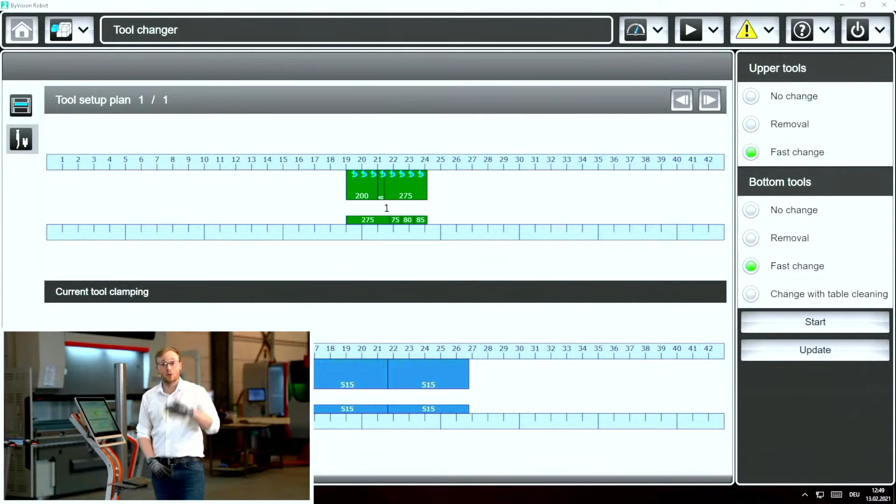That's specially needed when you have gooseneck tools. You will maybe rotate them to give your operator more safety in front of the machine. For this, we have the turning station I talked about before, and we can click on Start, so it will remove the old tools and bring in the new ones.

So first we will remove everything, and then we will go to the new tools. Last but one. And now we start to bring the new tools.

We're working with a V16 as a lower tool, and before, the cropped one as an upper tool, and this one needs to be rotated. So we're now in the position to rotate everything.

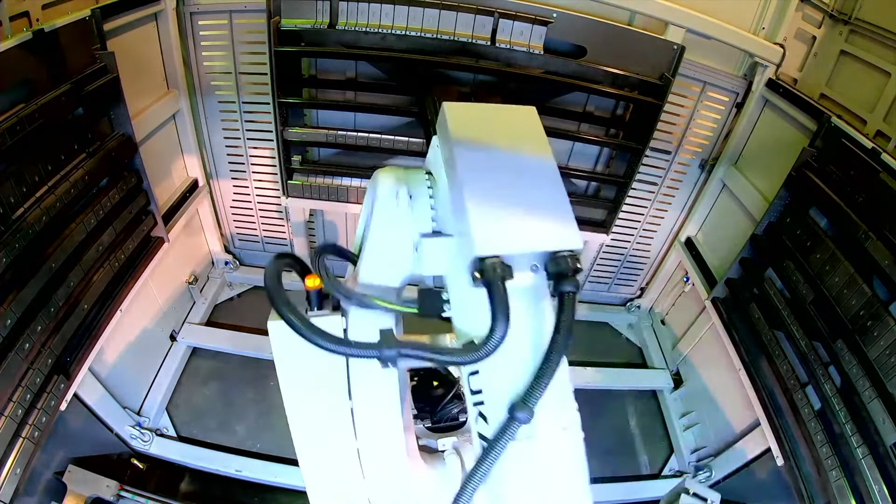So one more segment to go: 275 millimeter P4. Again to the turning station.

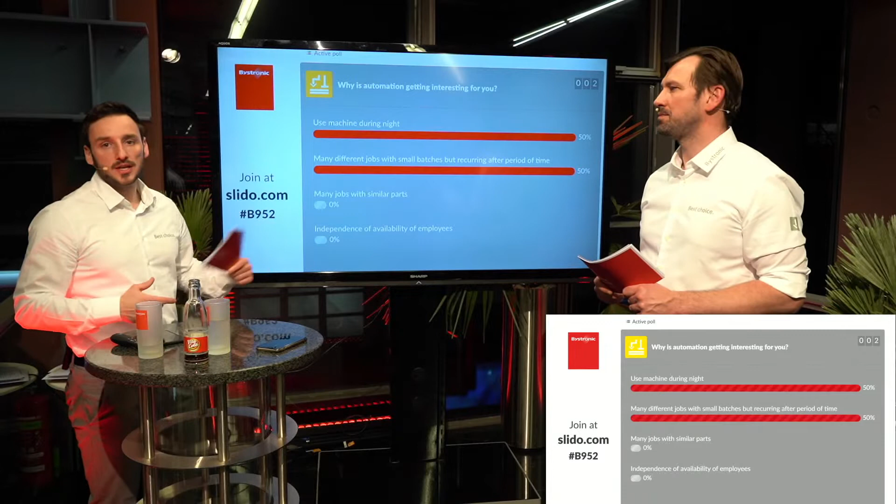So please feel free to vote in Slido to give us your opinion, to have a better view why you are interested in getting automation. So it's really to maybe add a third shift, as we can see, so to use the machine during the night, be productive 24/7, a very important point. But it also voted for many different jobs with small batch sizes.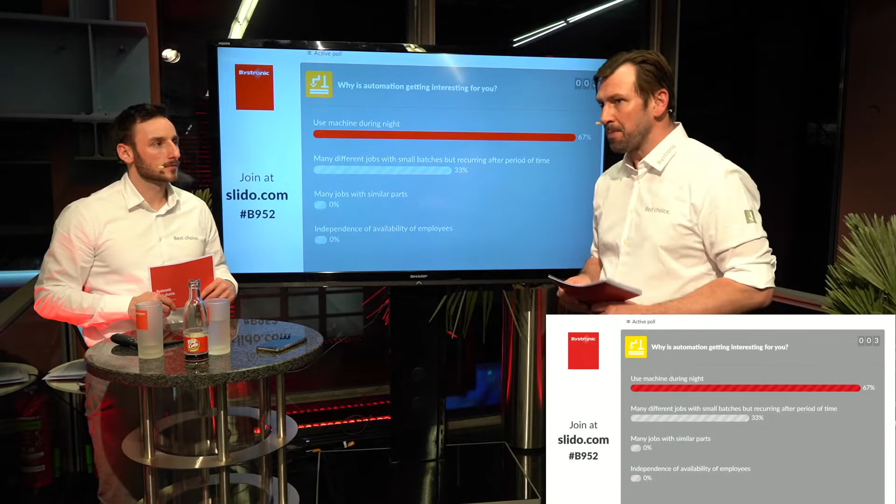And that's what's really interesting, where we have been moving. And that's also what we see in our sales statistics now, that especially the mobile bending robot is nearly as often sold as an Xpert 40 now. And that's really what we see, this big movement into automation.

Maybe it's also one reason is something like Corona, because you can't go back into your factory always, and you have automation in and then you can switch it on. Or at least maybe one guy can go and the other people can stay at home. So it's something which is changing the world at the moment, we think. Exactly, and I think we have good solutions for this.

And you have voted that most of you would like to use the machine during the night, to have additional capacity for producing parts. And this is exactly what you can find also on our bending automation products. At this stage, I want to hand over back to my colleagues Sebastian and Sarah, who will introduce our next topic for you, which is also interesting, especially in the fact of automation.

We have already seen many of Bystronic's products and innovations. So, Sarah, how can we track them and how can we keep the overview about this? Yeah, for sure. The B-Cockpit provides us with any data, any production data, for any time and for any services. So, Luis, please tell us more about this digital service.

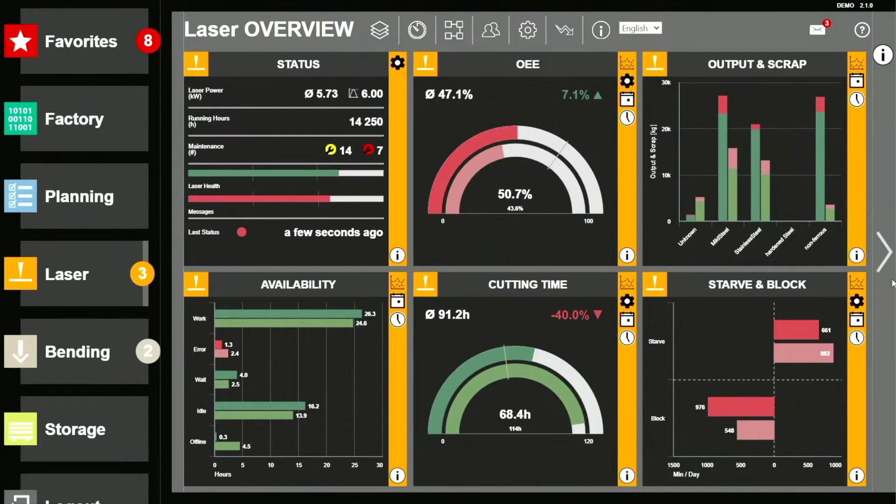In the tab Laser, you have the status of your laser machines to predict and prevent issues and reach the highest level of availability. You have the running hours of it, you have the overall equipment effectiveness, and in the diagram starve and block, you can see if the machine is waiting for material or waiting for a user input. From the laser overview, you can break down to each single laser machine with a video stream and also the status of each machine.

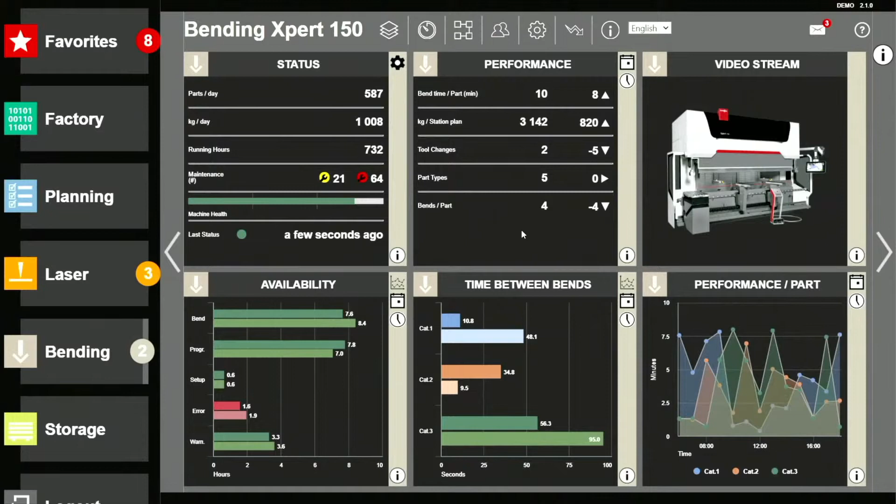In the tab Bending, we also have the bending overview. We have the performance of all bending machines and the time between the different bends. From the overview, we can break down again to the single bending machines and have all diagrams. You have over 25 KPIs, and in the tab Storage, in combination with the Plant Manager, you have the value of your storage, the material rate, and the range.

And all in all, you have the messenger service to have everything directly on your mobile device.